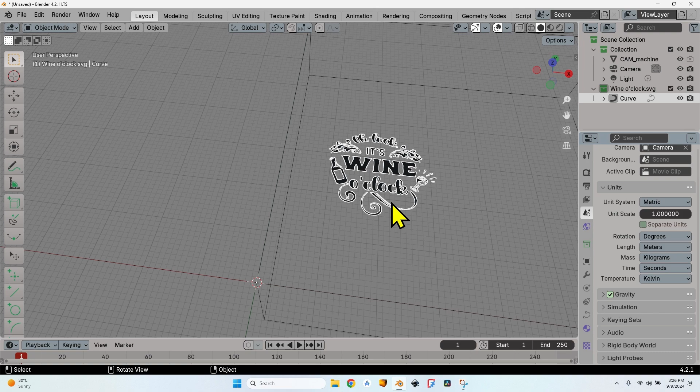It's easier to move around now, so let's place it somewhere close to the origin. Because the origin of the SVG is here and I want it to be in the world origin, I will select it, go to Object, go to Set Origin, and click on Origin to 3D Cursor. Of course making sure the 3D cursor is in the world origin, but since it's a new document it should be there.

After that, the first thing I want to do is make sure the curves are okay, that there are no double lines on top of each other, because this might generate issues later. So open the side menu from the left, scroll down to the Curve CAM Tools, and here I have a button, Remove Curve Doubles. You can also specify a merge distance larger than 0 if there are lines very close together but not perfectly overlapping. I will try first with the value of 0, click OK. You can see the inside faces have disappeared, but that's not a problem because for what I'm going to do it's okay like this.

So let's go to the right, go to the Render tab, change the render engine from Eevee to CNC Cam. It used to be called BlenderCam, but now it's called CNC Cam. So if it's not called CNC Cam, go download the latest update and install it. In case you're installing it in Blender 4.1, most probably the latest update won't work, so you also have to update Blender to 4.2.

Before making any operation, I will scroll down here to the tab called Cam Machine, because I want to make some settings for my machine. After doing this a couple of times, you will save a preset and you will already have everything set up.

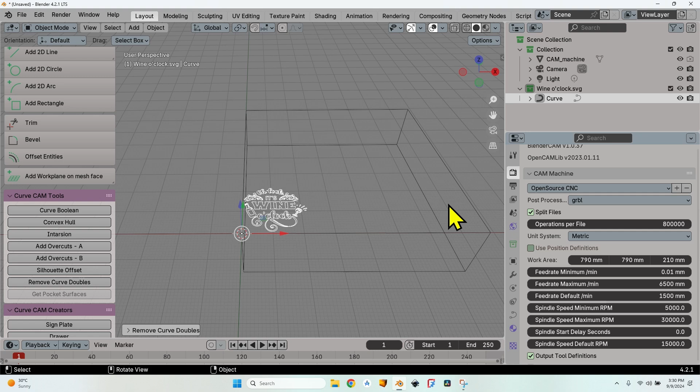My machine has a work area of 790 millimeters by 790 millimeters, and the height, the total movement of the cutter head, is 210 millimeters. This doesn't really matter because it will generate the G-code outside of this box. This is the CNC machine, the work area. BlenderCam has no problem generating G-code for pieces that are outside of the machine space. It will show you a warning, but it will generate the G-code without any problem. Still, I believe it is a safe thing to do to make sure that everything fits on your machine. So set the work area correctly according to whatever machine you have.

The next settings that I'm going to make are the feed rate minimum and maximum. Why do I need to change this? Because no matter what I set in the operation, it must be in this range. So if I had a feed rate maximum of 1000 millimeters per minute and I set an operation with a 3000 millimeters per minute feed speed, it will be automatically reduced to the maximum feed rate of the machine. So make sure you have a correct feed rate here.

I will leave it to 6500. The default feed rate, you can also change it, so you won't have to change it when creating operations, but this can only happen in situations when you have a lot of repetitive tasks. Otherwise, most probably for each operation you have to set a custom feed rate speed. I will write 2500 millimeters per minute value.

The same that I've told you about the feed rate applies to the spindle speed, because if the spindle speed that you set in the operation is outside of this range, it will be modified automatically to the closest one. If it's higher than the maximum, it will be reduced to the maximum. If it's smaller than the minimum, it will be brought to the minimum value. 5000 to 30,000 is okay for my machine. In fact, my machine has a maximum spindle speed of 24,000, so let's modify it here.

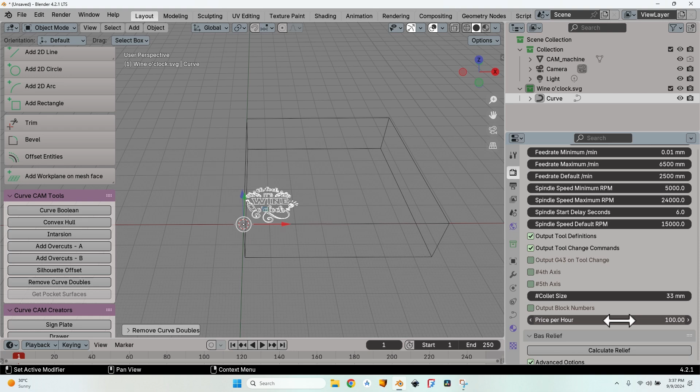So if somebody asks me how much it would cost to make a V-Carve operation for this design that I've loaded, I can easily tell them the price in just a couple of seconds after setting the operation. I'll have the total price shown there, so I can make a correct quote immediately without the risk of losing money or overcharging and losing a customer.

One thing I forgot to modify, because it was already set as required for me, but it's important to know that you can also change the post processor. You have a list of post processors here. I'm using GRBL, so this is okay for me.

Now, after setting the machine, let's scroll up and start creating the V-Carve operation.

Make sure you have the curve selected and click on this button here under the CAM operations. Click on the plus button, which will create an operation called curve - it's the name of the object that I have selected, op before from operation, and 1 the number of the operation. Now let's scroll down and make all the settings so you know how to set everything up.

In order to get the correct result without any trouble.

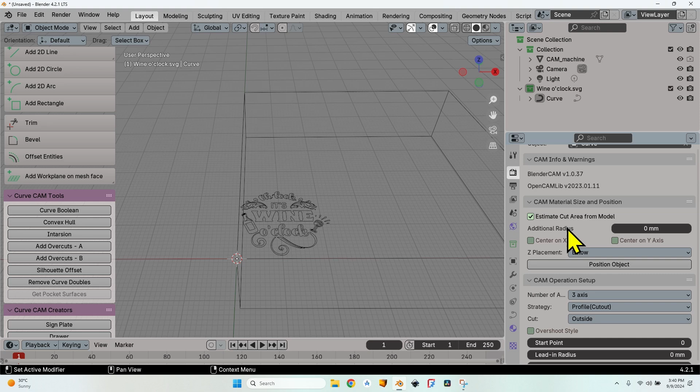The first tab I'm going to stop at is CAM material size and position. I will leave the estimate cut area from model checked, so I don't have to set the dimensions of the material by hand. Sometimes you might want to do that, but for now BlenderCAM simply doesn't take into account the material size. It only takes into account the dimensions of the object you are milling, so no matter how large or small you set the material, it will simply cut the entire object that you want to cut.

The next tab, the CAM operation setup, has 3 main values: number of axes, which I will leave at 3. The strategy, I have to change it - I'm going to use a medial axis operation.

The 2 values behind the strategy that have appeared are specific for each type of strategy. Try to leave them at the default values - leaving them as they are will most probably get some good results. If I'm not satisfied with the G-code generated, I can try to modify them a little to get higher accuracy or faster speed, depending on what my problem is.

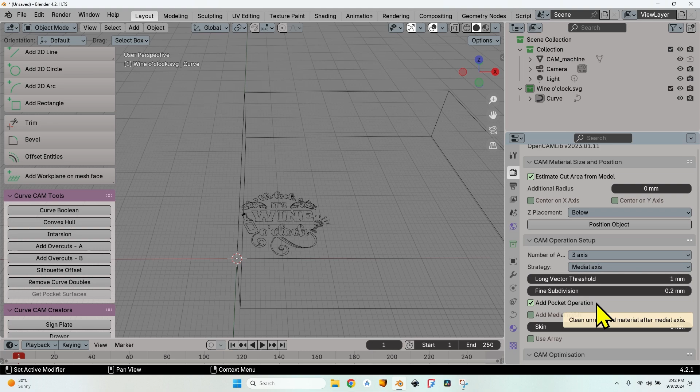One of the most important things here is this checkbox, the add pocket operation. Let me zoom in a little and I'll explain what this means. You can see here at the W, the width is very large - most probably my cutter tool bit, my V-Carve tool bit, is smaller than the distance between these 2 lines. One great thing about the V-Carve operation in Blender is that whenever the graphics is wider than the tool bit, it will generate 2 passes, 1 on each side, and in the center there will be some material left.

Checking this button will generate another curve after processing this operation, that I can use to remove that material. When we process this operation, you will see the generated curve for the pocket operation and how to set everything up in that operation too.

In case you are making a project that involves multiple copies of the same project, you can check this box, use array, and you will have some values here: the X count and the distance between objects, the Y count and the distance between objects, so you can mill multiple items at a time. It's very useful when making production - for example, coasters. I'll uncheck it now because I'll only make a copy.

At the CAM optimization tab, I'll leave everything as is. I'll only check the simplify G-code button with a default tolerance. I've tried modifying it and the results are pretty odd, so it's useful to check it, but leave the default tolerance as it is.

Moving on to the CAM operation area, I have several options here. The first one is use layers. I'll leave it checked and set a layer of 2 mm, because otherwise the generated toolpath will include some very deep plunging, and that might damage the object, the CNC, or the tool bit. It's preferable to use step down - depending on your setup, you might use a larger or smaller value.

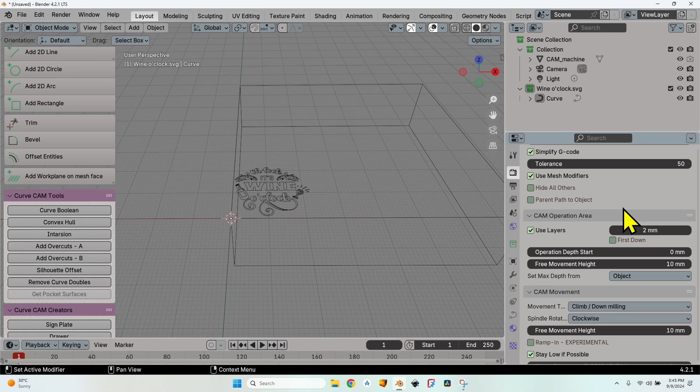That is up to you, I'm not going to talk too much about that right now. When using Blender CAM, the default depth start is always set to 0. I'm used to setting 0 to the table of the CNC, with the object above 0. This time I'm going to mill a piece of wood 20 mm thick, so I'll set the operation depth start to 20 mm. Now I have a collision warning, because the free movement height, the height at which the cutter moves when not milling, must be higher than the depth start. I'll use 35 mm.

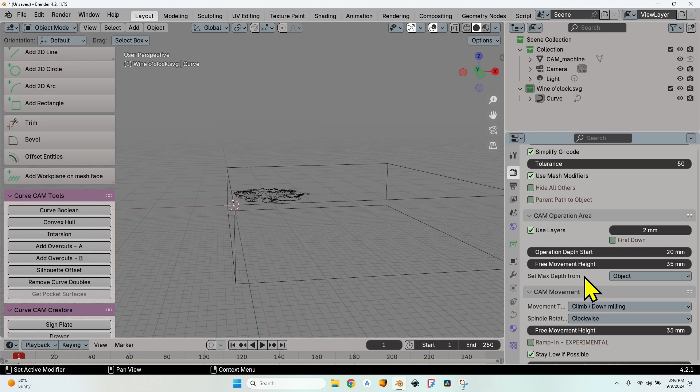The warning is gone. When making a VCarve, you most probably want to limit the total depth of cut, depending on the material and how you believe it will hold on later. Setting max depth from object will end the operation at the lowest point of the object. In my case the object is set to 0, so it would VCarve from 20 mm to 0 mm, which is way too much. I want it just 3 mm deep, so I'll change set max depth from object to custom. Since my operation starts at 20 mm, I'll write 17, resulting in a maximum depth of 3 mm.

The next tab, the CAM movement tab, has settings about the direction of the tool bit, but since this is a V-Carve operation, the cutter is engaged on all sides at any given time. So no matter if I set the movement to conventional or climb, it will be climb on one side and conventional on the other.

There's another setting for free movement height, but you can see it's synchronized with the one above, so it's redundant and I won't modify it from here. The stay low if possible option avoids raising the cutter head to the safe height if the path won't collide with the stock—you can leave it like this, but don't change the merge distance, as this will result in wrong movement. I've tried it and had weird results.

I'll also leave protect vertical as it is, with a 4 degree vertical limit. This means any slope between 86 and 90 degrees will be treated as a 90-degree slope, to avoid damaging the tool bit.

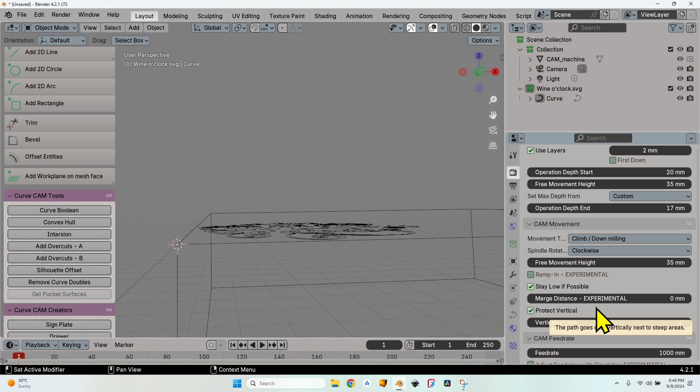For the feed rate, I'll change the value to 2200, but that depends on the machine, the tool bit, and the material. In BlenderCam, the plunge speed, the speed of movement on the z-axis, is expressed as a percentage of the normal feed rate on x and y, default set to 50%. Depending on the material you might want to change that. The plunge angle is the angle from which it considers the movement a plunge, and BlenderCam will use the plunge speed, which can be lower, as I've told you earlier. I must also set the spindle speed, the RPM—18,000 should do it.

Let's move to the next section, the cam cutter section. I have a couple of presets here—you can see there are a lot of ball ends and cylinders, and for V-Carves this is a custom tool bit that I've created myself. Let me show you how to do that.

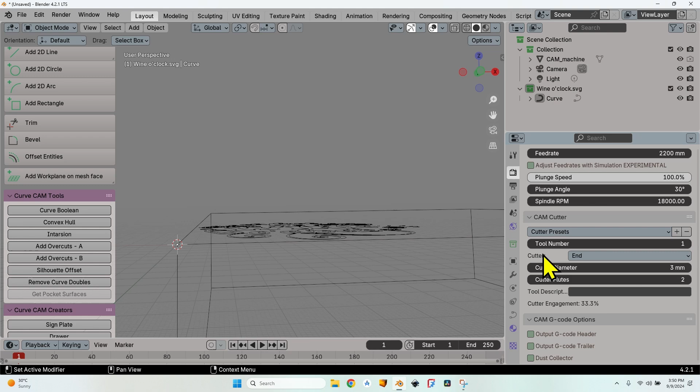Go to the cutter, and here I have several shapes. For the V-Carve operation I'll select a V-Carve shape. The cutter angle is the angle between the horizontal and the edge of the cutter—not between the two lines of the cutter, but between the horizontal and the edge. In my case I have a 90 degree tool bit, which translates to 45 degrees to the horizontal line. Its diameter is 10 millimeters and it has 2 flutes.

Let's write a tool description: 10 millimeters V-Carve, 45 degrees. I'll select all this text and press Ctrl+C, because when I click the plus button to add it to the presets, it will ask for the name and I'd have to write it again. So I press Ctrl+V, and now I have this tool bit. I can use it in any other job from now on—it will always be in this library.

The only option missing from here is the cutter length, which, as I've told you earlier, is a problem because you cannot detect collision without the length of the tool bit. Moving on to the next tab, I have the cam GCode options.

I will only check the output GCode trailer, because if I don't have M02 written here, after finishing the operation on my GRBL machine, the spindle will keep spinning and I'll have to manually turn it off. Writing an M02 command at the output GCode trailer will stop everything, so you need to do this. The dust collector, hold down and mist options are also here, but I'm not using any of these, so I'll skip over them.

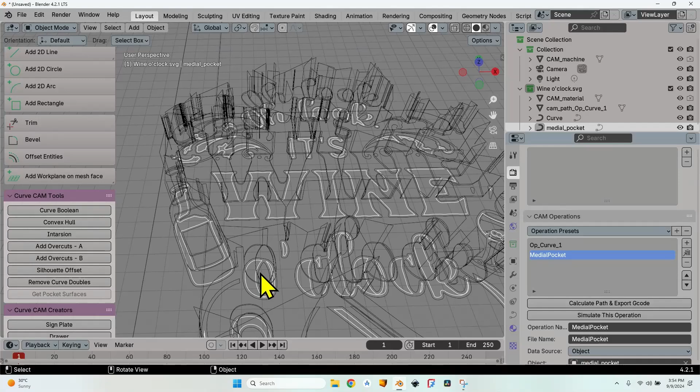As you can see, I have another operation here called Medial pocket. I also have the curve here, and if we take a look from top, you can see it is a curve inside of the curve that I'm trying to mill, because the V-Carve tool bit will remove the material, but I still have to remove all the material from the inside.

So now I have to scroll down and set the values for this operation. I will check the estimate cut area from the model because I want to mill the entire surface. Leave the strategy to pocket, it has been automatically set when creating the initial operation, and I only need to change a couple of things, which are the use layers.

I will set a value of 2 millimeters, just like for the V-Carve operation. The most important things I want to set are the operation depth start, which by default is 0 millimeters. Since my origin is set below the material I'm milling, I don't want that to happen, so I'll use a start depth of 20 millimeters.

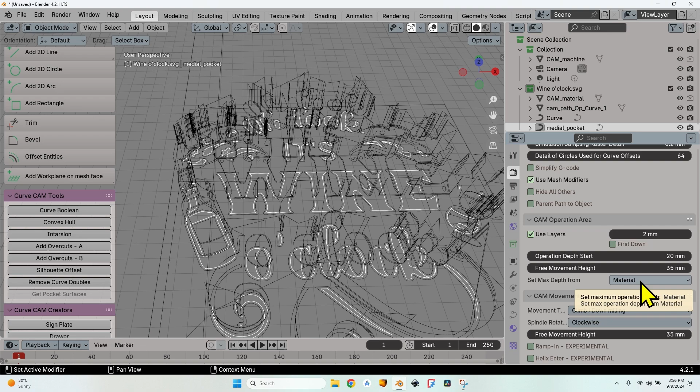The free movement height I'll set to 35 millimeters. One more thing I need to change is the set max depth from, because since it's from material, it will stop at the bottom. So I want to change it to custom and set the same depth as I did for the V-Carve operation, a 17mm max depth. Now this operation will mill all the material remaining inside these shapes from the previous operation.

Now I can scroll down to the cam feed rate and change these values, the plunge speed and the spindle RPM. The last thing I want to change is the cutter, because it's using the same V-Carve cutter from the previous operation. I don't want that, I'm going to use a 3mm end mill.

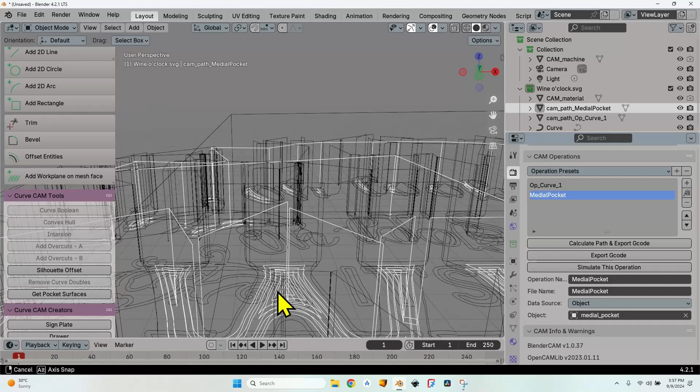After setting the cutter, I can scroll back up and click on the calculate path and export G-code button. You can see the operation is now correctly placed at the correct height. I have the 2 layers required to mill the 3mm. I can now take the files and go to the CNC to mill this model and see what turns out in the end.

But how do you find the files? It's kind of difficult if you haven't saved the file. You can see here my file isn't saved, and I find it difficult to find the G-code files. So in order to do that, I'll first save this file, and the G-code files will be in the same folder. Go to Blender, save the file as wine VCarve.blend.

Save the file, and now I can click again on calculate path and export G-code for the first operation. Now select the second operation, click again on calculate path and export G-code. I could have also clicked only on the export G-code button because I didn't really need to recompute all the operations, but I missed that button.

So remember, there's an export G-code button if it didn't export correctly because you hadn't saved the file. After saving the file, you can click on export G-code. So it's that easy to create a VCarve operation in Blender.

I will show you another example without explaining all the settings I'm making for the operation, simply to show you how quickly you can set everything up in just a couple of seconds. So let's create a new file. Let's import this very nice skeleton, since Halloween is closing in.

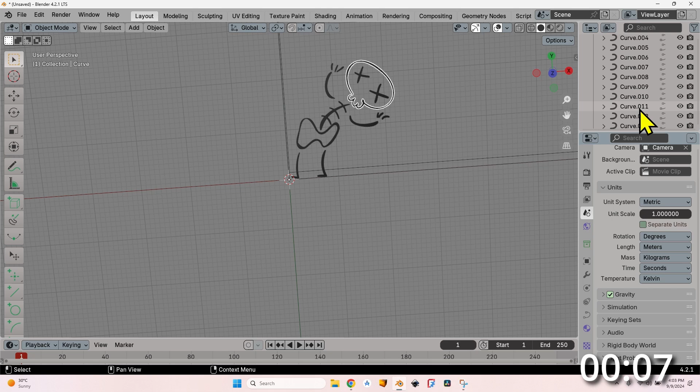I have several curves, select all of them, press Ctrl J to join them into a single curve. Now open the left side menu, scroll down to the curve cam tools, click on remove curve doubles, leave the default merge distance of 0, click OK, and now I have the correct outline.

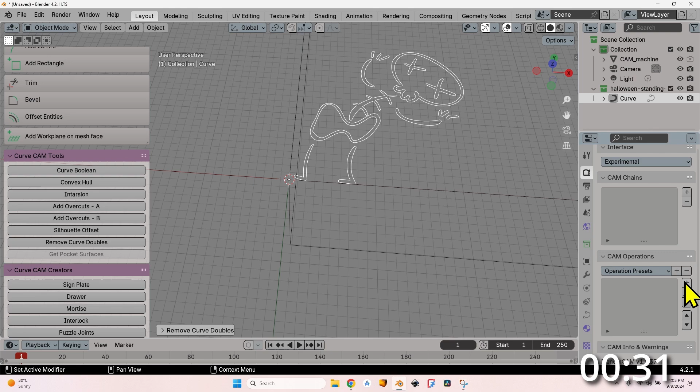Go to the Blender cam, select the engine to CNC cam, scroll down and make sure I have the correct machine. Now with the curve selected, press on the plus under cam operations. Let's take all the settings one by one quickly.

Strategy: medial axis, simplify the G-code, change the scene from meters to millimeters. It's quite annoying that it always switches back to meters, so I will use layers of 2mm. I will start the operation at 20mm with a free movement height of 35. Set max depth custom to 17mm.

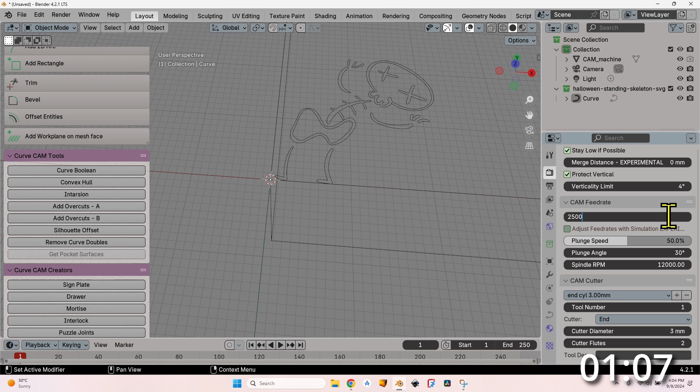I will use the same values as in the previous example. Leave the movement as is. Change the feed rate to a higher speed for my machine. Also change the plunge speed and the spindle to 18,500. Select the proper tool bit, the 10mm V-Carve 45 degrees that we have set earlier.

Check the output G-code trailer. The M02 is by default filled here if I have already written it once. Now I can scroll up, click on calculate path and export G-code, and now I have the G-code for this operation. Let's see the medial pocket.

You can see here highlighted in white, so we need to make also this operation. Check the estimate cut area from model, scroll down to cam operation area, check the use layers, write the value of 2mm, make it start from 20mm with a free movement of 35. Change the max depth from material to custom and set a value of 17mm.

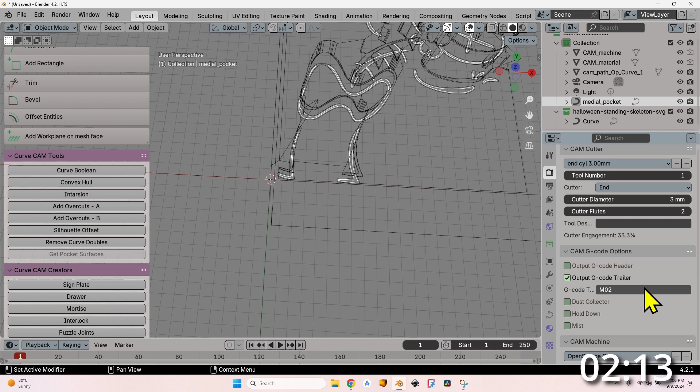Go to the cam feed rate, set a correct feed rate. Also change the plunge speed, the spindle RPM. Select the proper tool bit; I will use a 3mm end mill. Check the output G-code trailer and make sure M02 is here. Now scroll up, click on calculate path and export G-code, and I have the operation for this too.

Of course, there are some differences because the medial pocket, if you take a look at it here, it still has some milling to do inside of these areas, but they are very thin. I probably should have used a much smaller tool bit. A 1mm tool bit should clear almost everything.

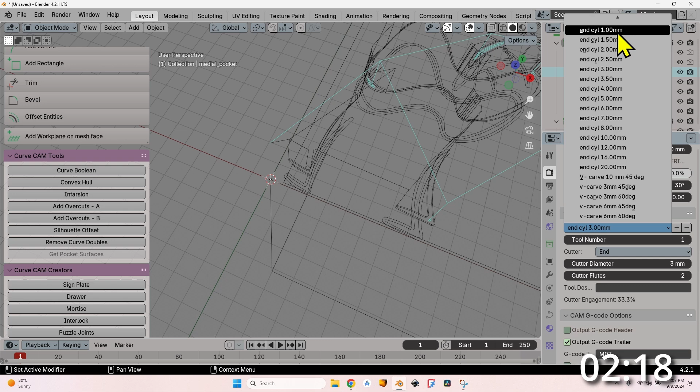Go back to the medial pocket operation, scroll down to the cam cutter and change it from end cylinder 3mm to a 1mm end cylinder. And I need to change the layer to 1mm to avoid breaking the tool bit. Now scroll back up and click again on calculate path and export G-code.

You can see now it goes much farther into the material, so most probably everything will be removed and the pieces that remain here are going to be so small that they are barely visible, or at least I hope so. We will see that when we go to the machine and mill everything.

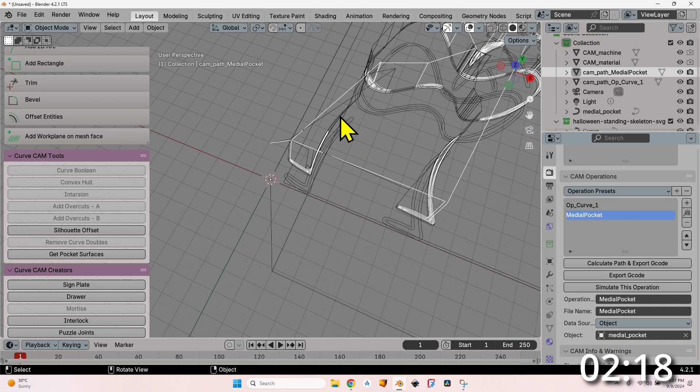So in just 2 minutes I have managed to take a file, import it, generate the G-code for the VCarve for the outside, and then the G-code for the pocket to remove all the material remaining in the inside. I think it's incredibly fast.

The results are awesome. It takes into account a lot of things. It does the medial line if it is possible, considering the width of the graphic and the diameter of the tool bit. If the diameter of the tool bit is not enough, it will change the strategy automatically to mill the outsides and then generate the curve that I need in order to mill the remaining material in the center.

Let's save this file too. Let's name it Halloween skeleton. Save the file, and now I can go here and select each of the operations and simply press export G-code. And now let's go to the machine and mill these designs to see how they turn out in the end.

So here it is after around 35-40 minutes on the CNC. This is the sign.

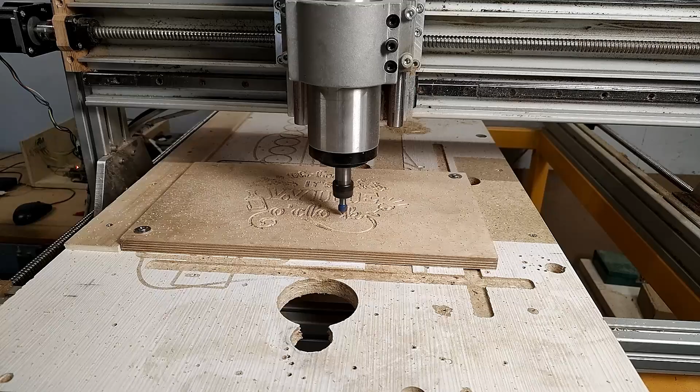Could I have done it better? Of course, because there are a lot of things that I haven't done properly when setting up the machine. I will explain in another video what I did wrong or what I didn't do, because there were some things that I had to do and I didn't do because I wanted to get this project done.

I also used a 3mm end mill and I should have used a smaller one, a 1mm end mill, because that would have cleared much more material from what has remained between the VCarve toolpath. But I think it's okay with just a little cleaning. It will be a very nice sign.

So this is a way to make the toolpath to generate the G-code for VCarve in Blender.